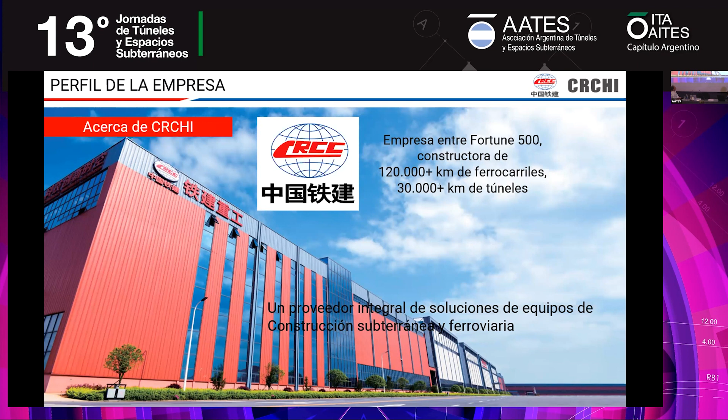Here is a brief introduction of CRCHI China. We are a subsidiary of CRCC, which is a World Fortune 500 company in the construction sector. CRCC had built about 120,000 kilometers of railways, which is half of China's railway, and 30,000 kilometers of tunnels. And CRCHI is an equipment manufacturing subsidiary of CRCC. And we are a comprehensive equipment solution provider for underground and railway construction.

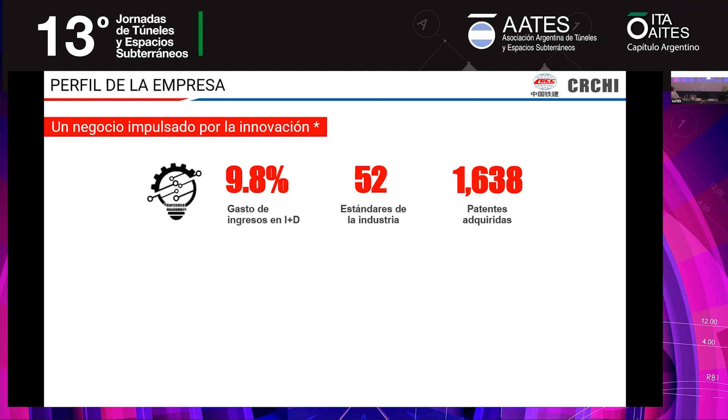Please go to the next page. Okay. So some figures that I want to share about CRCHI. We spend 9.8% of our income on R&D, and we participated in 52 industrial standards in China. More than 1,600 patents that we get. In terms of scale, we are the world's largest TBM manufacturer, with more than 5,000 employees, and turnover of about $1.4 billion annually.

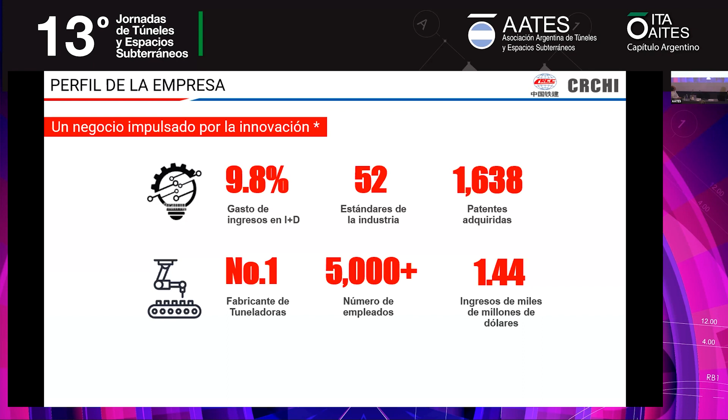Please go to the next page. So the sectors of business that we are in. First is the TBM business. And the second is for the NATM equipment, which is drill and blast tunneling machines, and the railway track equipment, mining equipment, green building equipment, agricultural machines, new transit equipment, and emerging building materials.

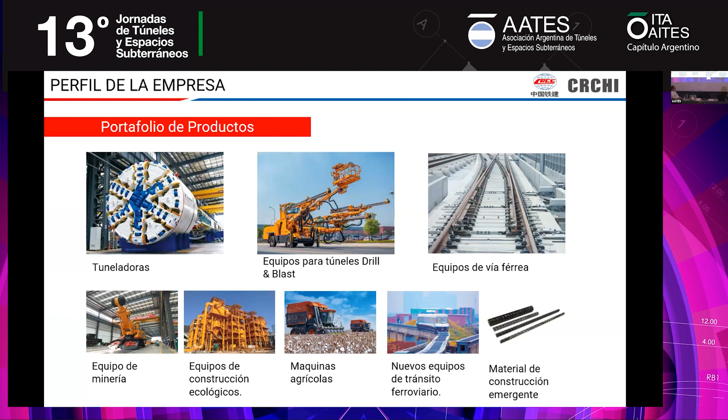To give an idea of the position we are in the TBM industry, this is the photo of what we provide in TBM. We provide all sizes of TBM from 0.5 meter in diameter up to 23 meters. And the biggest one is a 23 meter, which is a vertical shaft. We produce 9 series of TBM, more than 1,000 TBMs have been sold worldwide, and more than 5,000 kilometers of tunnels that we had worked.

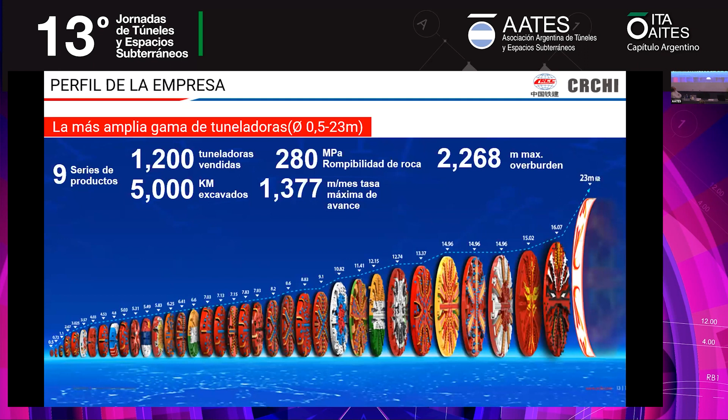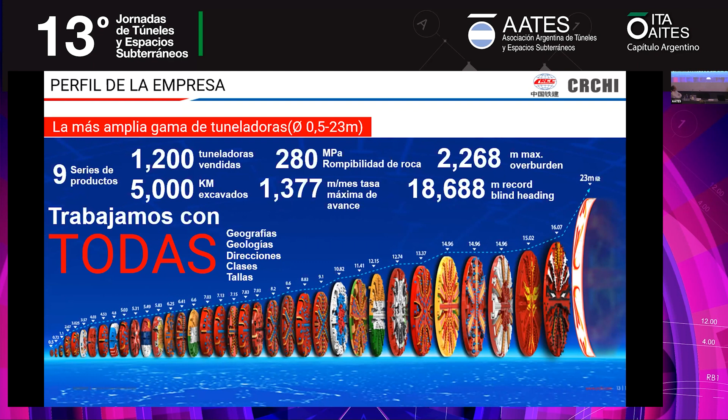The hardest rock our hard rock TBM had dealt with was 280 megapascal. The maximum monthly advance is about 1,300, and the maximum overburden is more than 2,000 meters. With a single TBM, the longest distance that we had bored is more than 18 kilometers, with no shafts. So for all kinds of geologies and geographies, sizes, types, we produce.

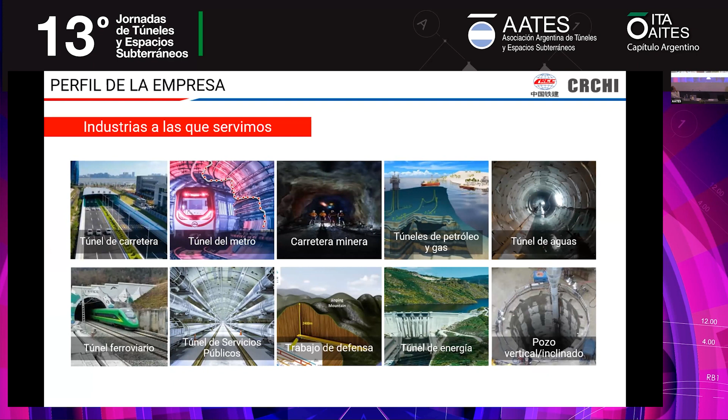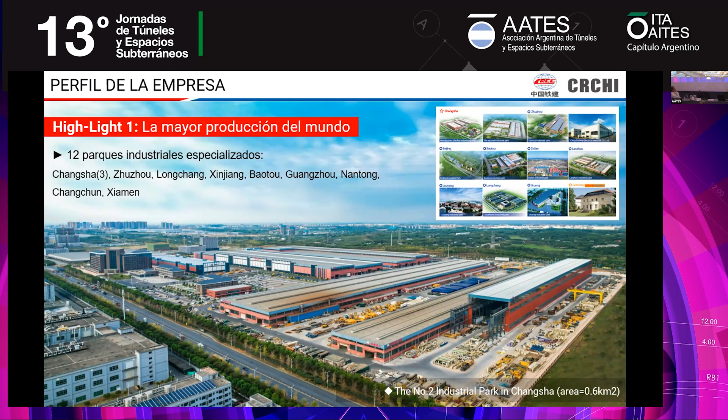So the highlights of CRCHI. The first is that we have a very big production base. As you can see in this photo, this is the second industrial park in our headquarters, Changsha. We have two industrial parks for TBM in Changsha. This is one of them. It takes a land of about 600,000 square meters. It's about 0.6 square kilometers. And we have 12 industrial parks located in China. These at the upper right hand are the industrial parks, the production bases that we have in China.

Second is intelligence, about automation. We use the technologies of 5G, Internet of Things, AI, automation, and digital twin technologies to better serve our clients with smart machines, like to supervise your machine online, and diagnosis from our headquarters. And we provide twin technologies to simulate your machine for the life cycle, etc.

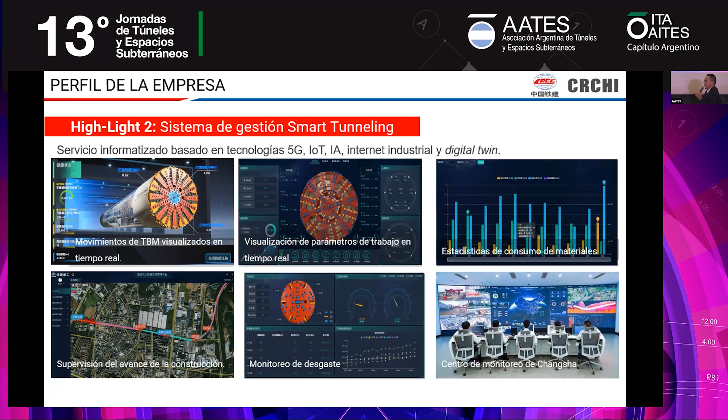Okay, next page. So the products or the equipment that we could provide for total mechanized construction, we have mainly 6 categories. First is a TBM, which is more and more popular in tunnel constructions.

We provide all kinds of TBM from EPB, which is conventional especially for metro construction, and SPB, slurry pressure balance, hard rock TBM, especially for water projects, and hybrid machines like SPB and EPB, or EPB and hard rock, pipe jacking, shaft boring, horse shoe shield TBM, multi-purpose, and a belt conveyor, which is working together with the TBM.

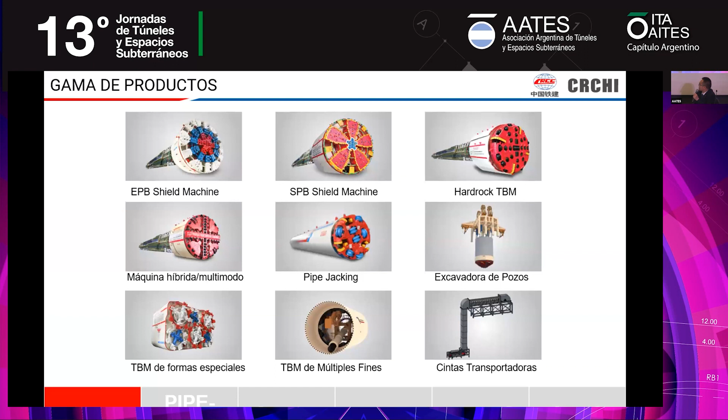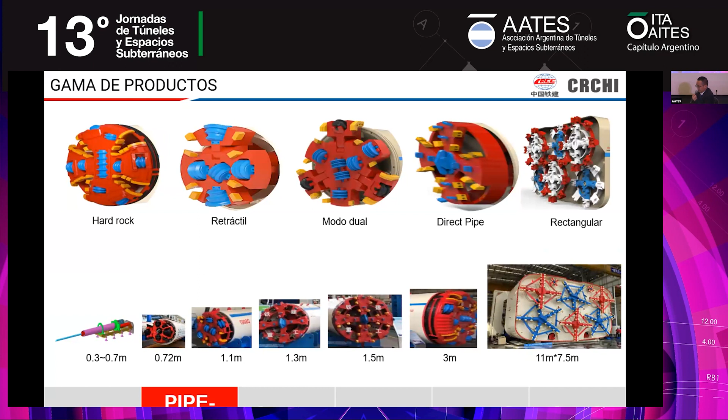The second is pipe jacking, because pipe jacking is a little bit different from TBM, so I list it separately. So we have different types of pipe jacking, like the retractable and the direct pipe, rectangular ones, from sizes 0.3 to bigger sizes, like this, sorry, to the next page. Like this 11 times 7.5. This is also a pipe jacking. And next page.

Third part is shaft boring machines. We have the biggest diameter, 22 meters, for a parking lot. And also they can be used for station construction. And we also developed a shaft TBM called the kilometer class, which means that it can vertically excavate to 1,000 meters, which is used in the mining sector, like for copper mines and gold mines.

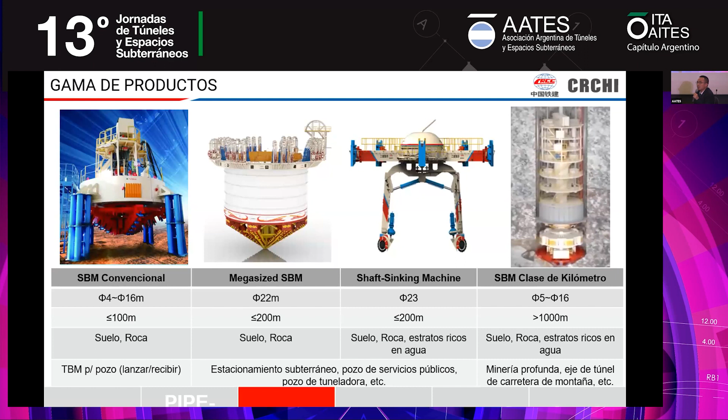Next page. NATM equipment, which is also called drill and blast. We produce a full set of drill and blast machinery solutions from pre-excavation, excavation, material handling, initial lining, secondary lining, and auxiliary works. So if there is a tunnel where you decide to use the NATM method, we could provide the full series of drill and blast equipment. Next page.

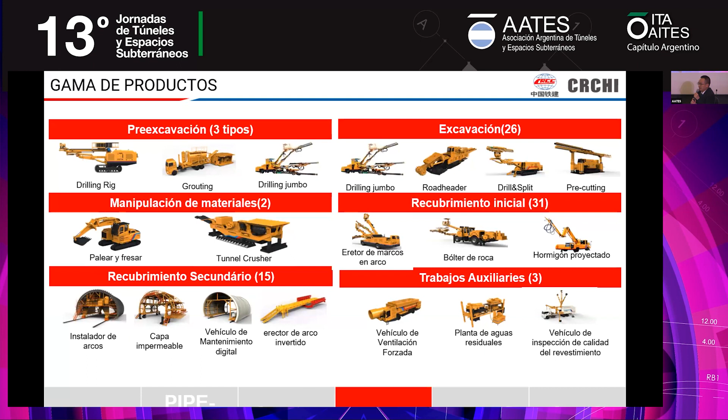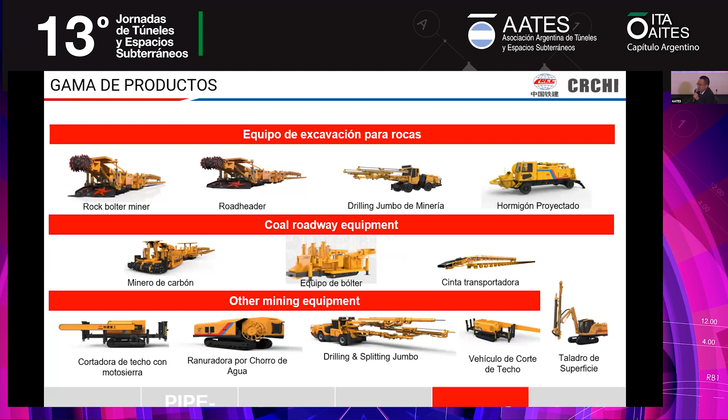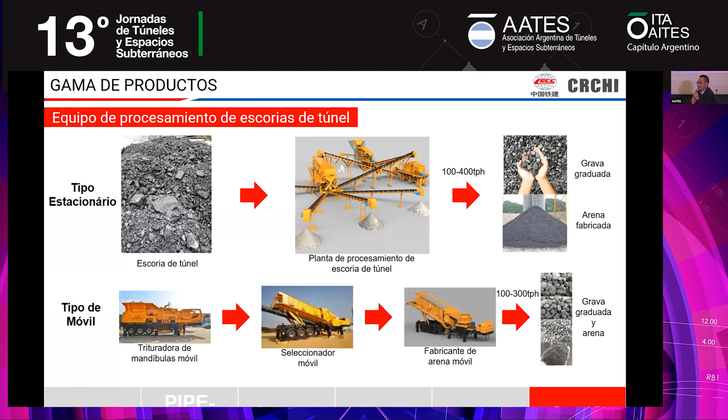The last is what we call tunnel slag processing equipment, and actually it's green building equipment. We also call it a stone crushing line: with hard rock TBM, the rock material can be recycled, because every construction project needs sand and stones to make concrete and building materials. So with this equipment, you can recycle these materials to provide sand and stones right at the job site. So this is environmentally friendly. Next page.

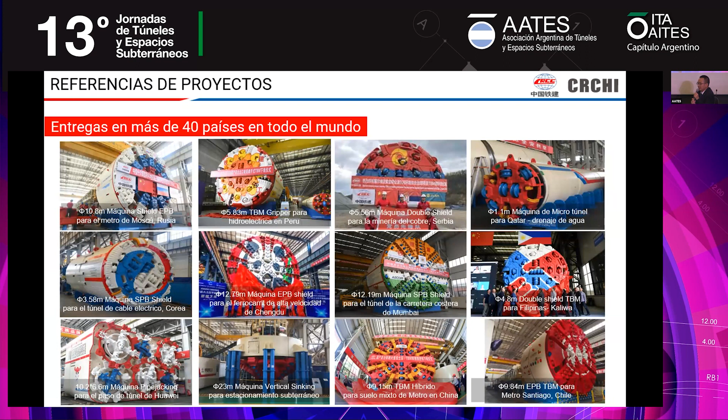Next page. So here I want to share some of our project cases. These are some of our TBMs that are sold or delivered worldwide. And what I want to mention is a hard rock TBM for Peru, and an EPB for Chile. Next page.

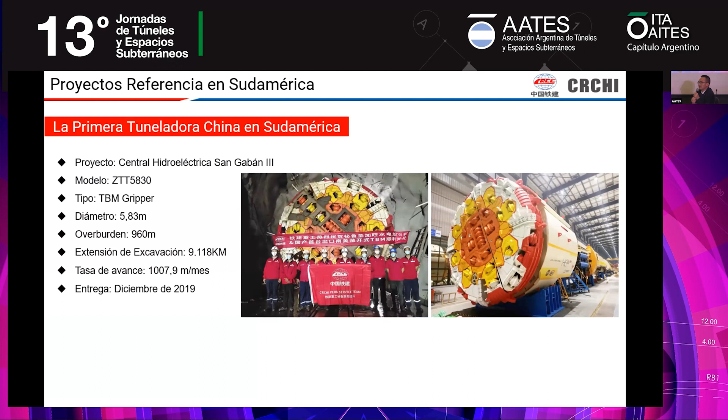This one is a hard rock TBM for Peru. It was delivered in 2019. It's a 5.8 meter hard rock, gripper type, and it reached an advance of 1,000 meters. And it is going to break through in about 2 months' time. Next page.

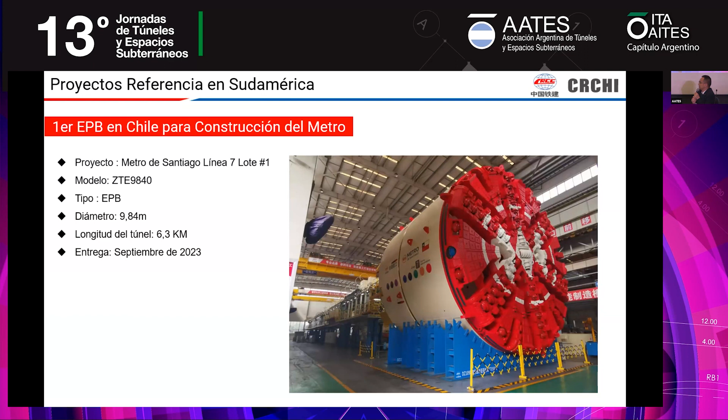This is a 9.8 meter diameter EPB. It was delivered just last month and is now in the Pacific Ocean, and it will arrive in Chile in early November and start its work early next year.

Okay, what I want to share with everyone here is the world's largest EPB TBM cluster in different geologies. This is the world's biggest TBM project. It's called Guangzhou Metro Line 18 and 22. These two lines altogether have a line length of 92 kilometers. It's a twin tunnel, so the tunnel length is 184 kilometers, using 52 CRCHI EPB machines with a diameter of 8.8 meters.

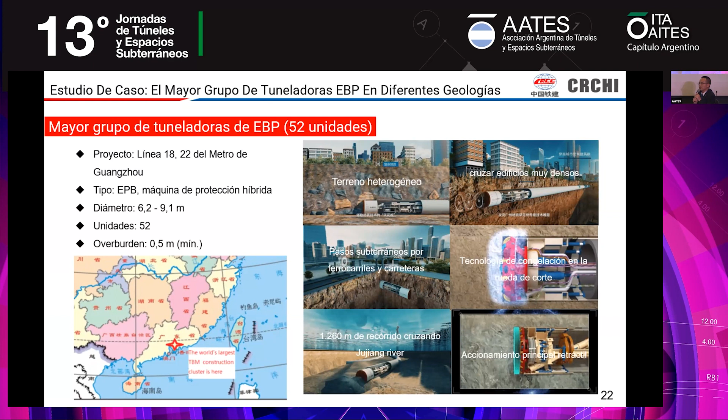For this project, we met different kinds of geologies, working conditions, and all kinds of difficulties that I will share later. For example, some of the TBMs undercrossed the airport, undercrossed buildings in the city area, and crossed rivers many times. The next page.

Here, I share some of our equipment information. This ZTE 6250: the 6250 is the diameter of the shield of the cutter head. ZTE means earth pressure balance. So this is the most common one adopted in China. In China, for metro construction, we use twin tunnels. So this is a typical EPB, a normal size EPB.

This machine reached a monthly advance rate of 573 meters per month, and the highest daily advance rate of 27 meters. The technical highlight is these twin screw conveyors. We use double screw conveyors because the pressure at the cutter head is too big. So we use these twin conveyors to reduce the pressure on the backup units. Next page.

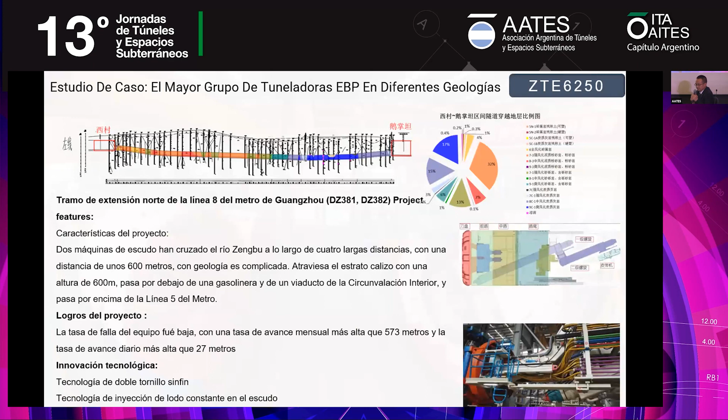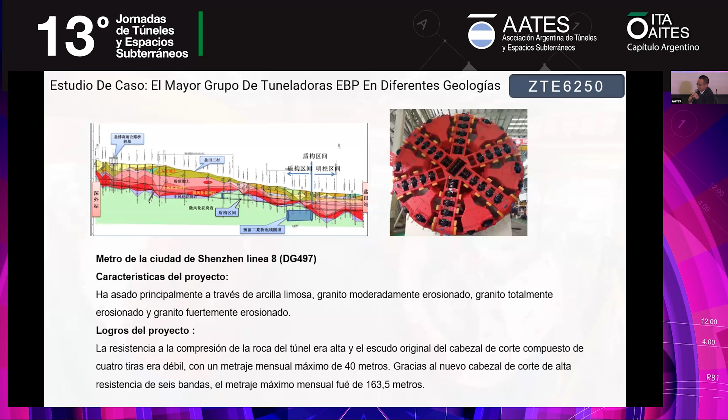This is another EPB used in Shenzhen Metro Line 8. This is a refurbished TBM. The original design of the cutter head was 4 spokes, and the speed was only 40 meters per month because it was not suitable for the geology. So we changed the cutter head to 6 spokes, and the advance rate improved from 40 to 163.5 meters per month. The next page.

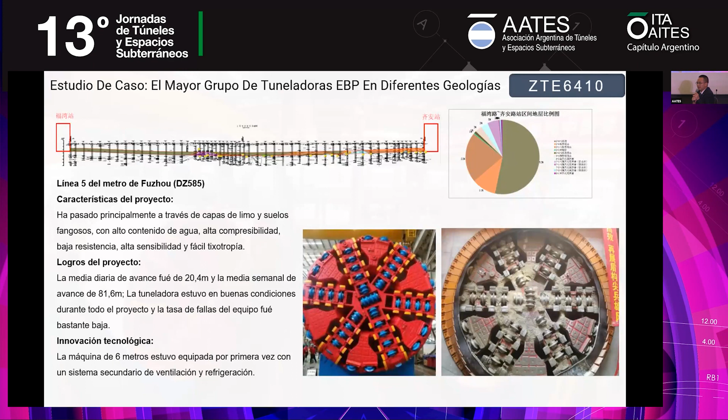Another EPB is a little bit bigger than the original ones. For this one, we used a secondary ventilation freezing system in the driving cabin. It is very hot, so we use the ventilation freezing system to make the work environment more comfortable. Okay, next page.

Next page, please. Next.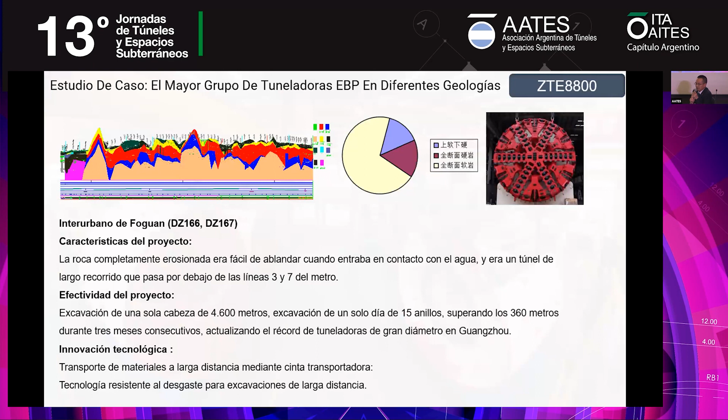So now comes to the very typical that I shared, the 52 cluster, the 8.8 meters. We have 52 8.8 meters in 2 single metro lines. This is one of the typical EPB. This EPB with a single tunnel of 4,600 meters, no shafts. So we use belt conveyors to take out the material, and it reached 360 meters per month. So this machine, we adopt a wear-resistant technology for long-distance excavation to make sure it gives no trouble during its long distance. Next page.

Okay. Next page, please. No. Sorry, this. Yeah, this one, please. Thank you.

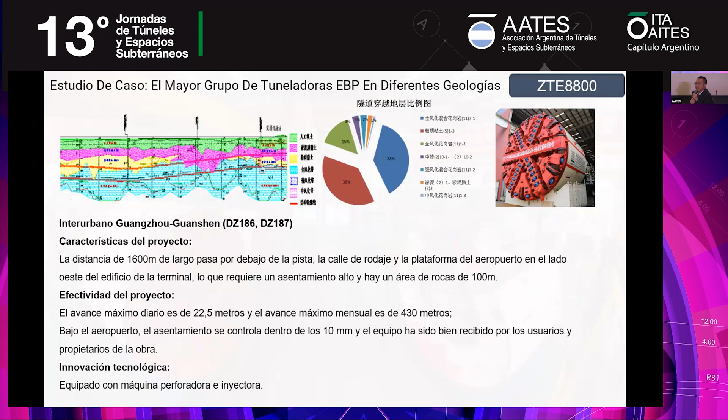For this machine, this is actually two machines. These two machines, the highlight is that they undercrossed the airport, just undercrossed the airport runway, the taxiway, and the sliding way. So this means that it has very strict control on the settlement. And this machine had reached a very good advance rate of 430 meters. The settlement is within 10 millimeters, which is 1 centimeter, when it is crossing the airport. Next, please.

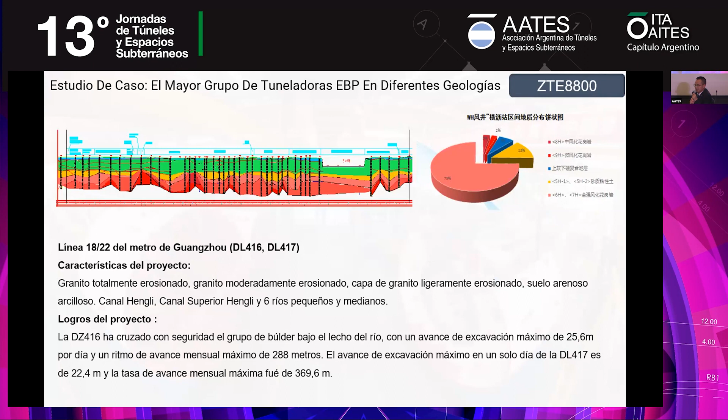This one is also an 8.8, which is used in the Guangzhou Metro Line 18 and 22 project. The characteristic of this is it crossed 6 small and medium-sized rivers. The maximum advance rate is about 370 meters. Next, please. Okay. These two machines are also characterized by very strict settlement control, and we used a new technology of cutter head freeze to stabilize the ground in front of the cutter head. Next, please.

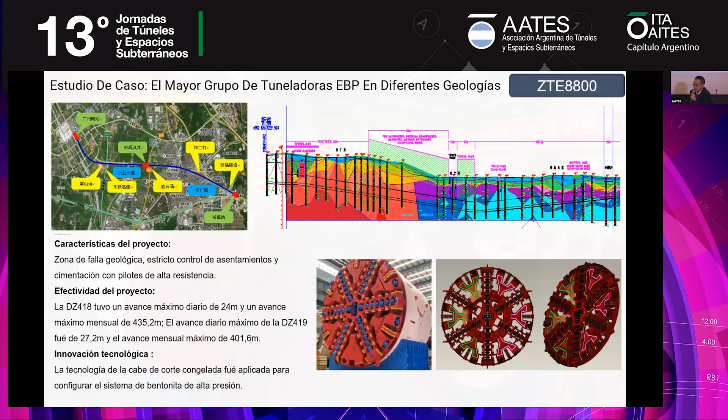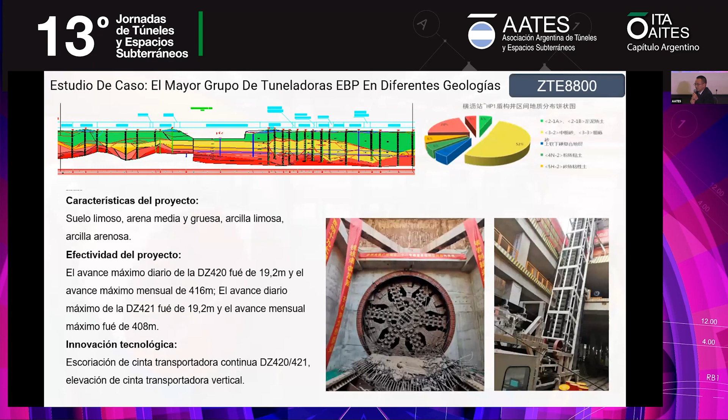This one, as we can see from this photo, we use a technology of vertical belt conveyor because of the shaft dimension. It was very small, and the height of the shaft is large. So we use this vertical conveyor to take out the material for this machine. Next, please.

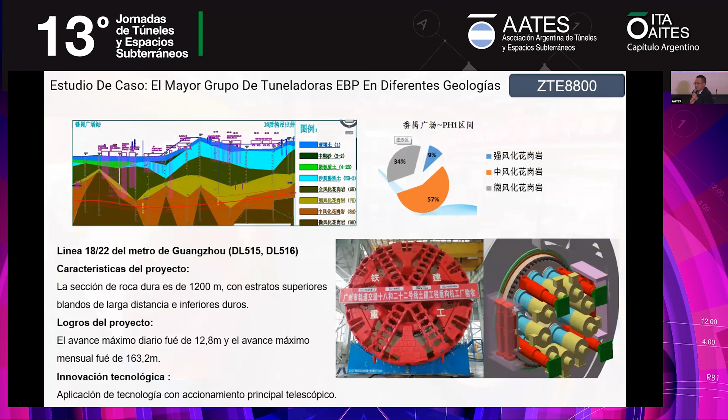Another EPB with another technology. We use telescopic main drive technology. It means the cutter head can move back when you are doing the excavation. So for changing of a cutter, and also in some difficult geologies where the cutter head could not move, we take it back, and then it will move ahead. The difficulty it met is that the ground was a little bit strange. The upper part is soft, and the lower part is hard. So we have to counter this difficulty to make sure the TBM doesn't make wrong turns. Next page, please.

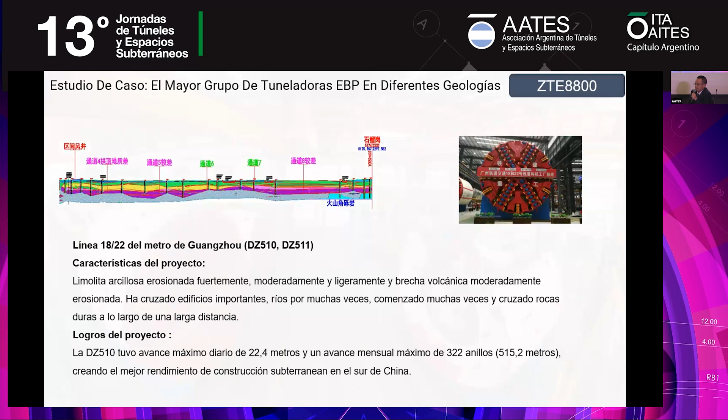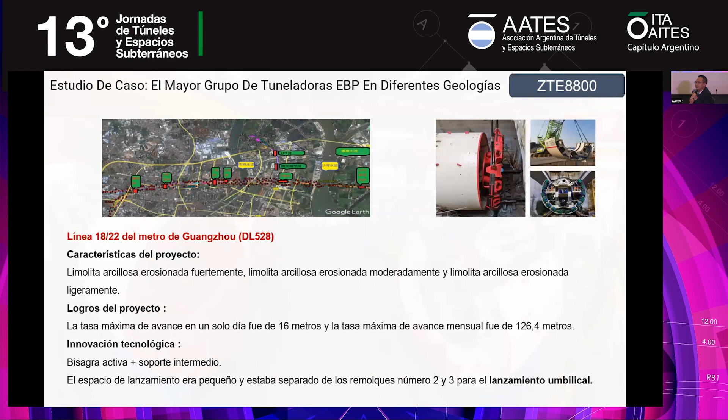This EPB, we adopted active hinge and intermediate support for small radius turning. And due to the limited space in the launching shaft, we use the umbilical launching, which is we put the head first, and then it pushes ahead, then the backup. Okay, next.

This is a hybrid TBM. This one is slurry and EPB hybrid. In China, we call it dual mode. It means that it could work in the slurry mode and also in the earth pressure mode. So we need to do a conversion. This is China's first earth pressure and slurry shield machine with our own technologies. The next page.

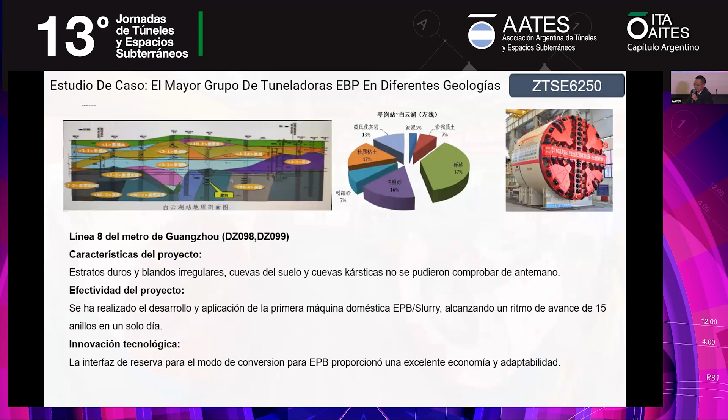This is a 9.1 meter hybrid. It's a hybrid of hard rock and EPB. This is China's first earth pressure and hard rock TBM, the dual mode with EPB and hard rock, with our own technologies. The feature of it is it has long distance hard rock and is prone to bursts of water and mud. So we use the earth pressure balance mode when it has too much water and risk of burst.

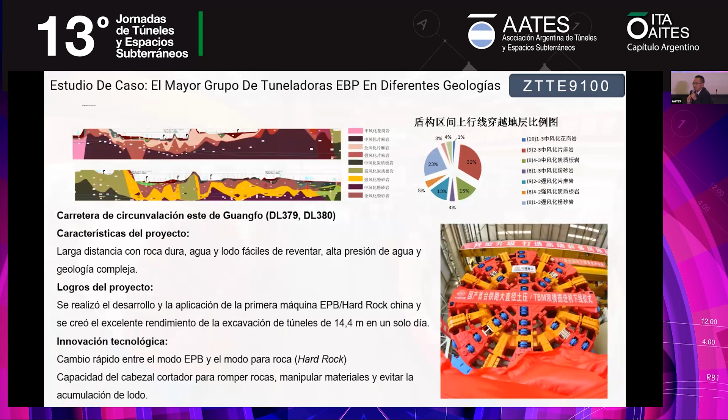Next, please. This 7 meter TBM is also a hybrid of hard rock and EPB. The highlight is that the screw conveyor is mobile. In the EPB mode, as we can see in the upper part, the screw conveyor is inclined. And when we change to the hard rock mode, the screw conveyor will be horizontal.

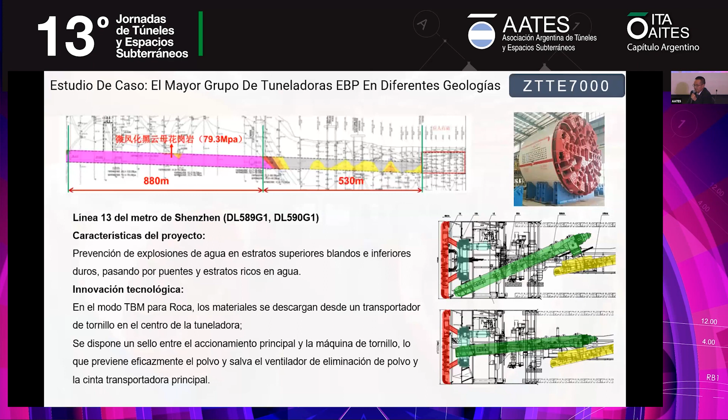Next, please. So this is my presentation. CRCHI is dedicated to developing and providing highly efficient and mechanized tunnel equipment solutions, and is trying to become the first choice of our clients worldwide.